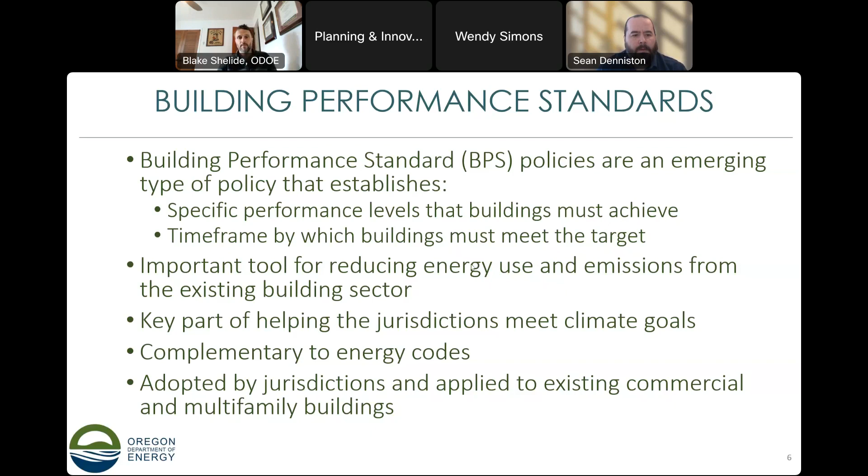In general, building performance standards include a number of components. Those components range from scope, different performance metrics, targets, various compliance and phasing requirements, and implementation mechanisms. I'll talk about a few of these in detail.

As far as scope goes, the scope of a BPS policy defines the buildings that are covered by the standard. The process of developing that scope is often informed by the objectives of a specific jurisdiction, whether it's energy or greenhouse gas, and also by specific considerations for target setting in order to achieve performance targets that can be established for each covered type of building.

The two primary factors that are considered generally by jurisdictions when establishing the scope of the BPS are the types of buildings to be covered, and then the size of the buildings, the threshold above which buildings will be required to comply with the standard.

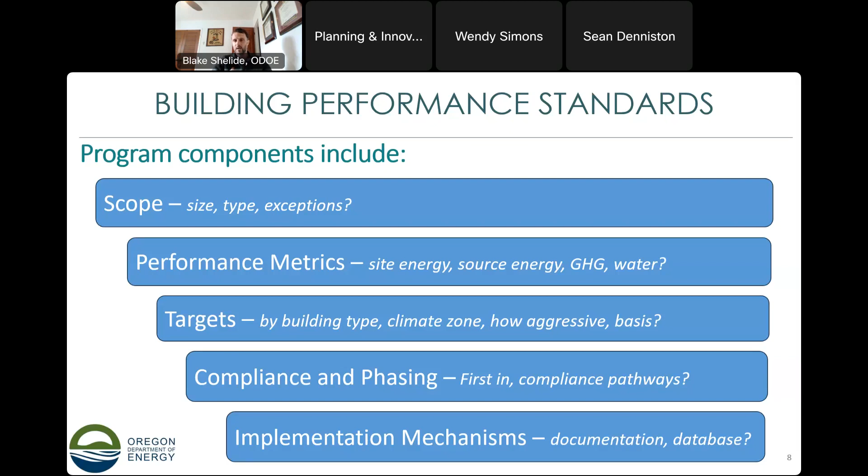And then other program activities like outreach, training, education, and things like that are critical components of a BPS.

So just to review some of those critical components: in general, building performance standards require certain building owners to meet certain performance targets by a specified date.

There's a number of critical key considerations that go along with BPS. There's aligning and establishing goals, how the BPS program and energy efficiency and greenhouse gas reduction from buildings fits within a jurisdiction's overall goals. Determining the covered properties, what property types, are there any exemptions and accommodations for things like financial hardships, or building occupancies like industrial or agricultural uses.

Considering various compliance approaches: is the compliance approach just meeting an EUI target? Maybe there's a prescriptive pathway as well. Maybe there's a conditional compliance pathway if a building can't get to the target but is taking steps to try to get there.

Another key consideration is providing support to building owners in terms of education and technical support. Some jurisdictions have incentive funding for early or voluntary compliance. There's also the potential to work with other partners or utilize other incentive sources to help get down to EUI levels to meet building performance standards.

And then establishing reporting requirements that are meaningful and achievable for building owners to report their energy use and document compliance.

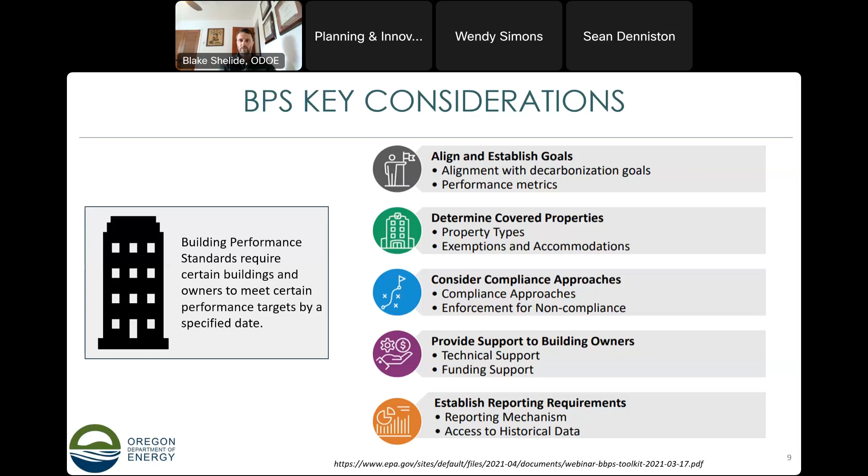There are a number of benefits to building performance standards in general. There's certainly reduction in energy use and reduction of greenhouse gas emissions to support jurisdictions in meeting their climate goals. Supporting local workforce, as building owners identify energy measures needed to get down to efficient levels of performance, that supports local workforce and jobs to improve that performance through investment in energy efficiency measures and technology.

One of the side benefits, the non-energy benefits of energy reductions and meeting performance levels, involves improved comfort, improved heating, cooling, ventilation, and lighting systems in buildings to use less energy and improve indoor air quality and comfort. And then, of course, when you reduce energy, you reduce utility cost and on-bill cost for building owners, through implementation of cost-effective energy measures to reduce the operating cost and energy burden of building owners and tenants.

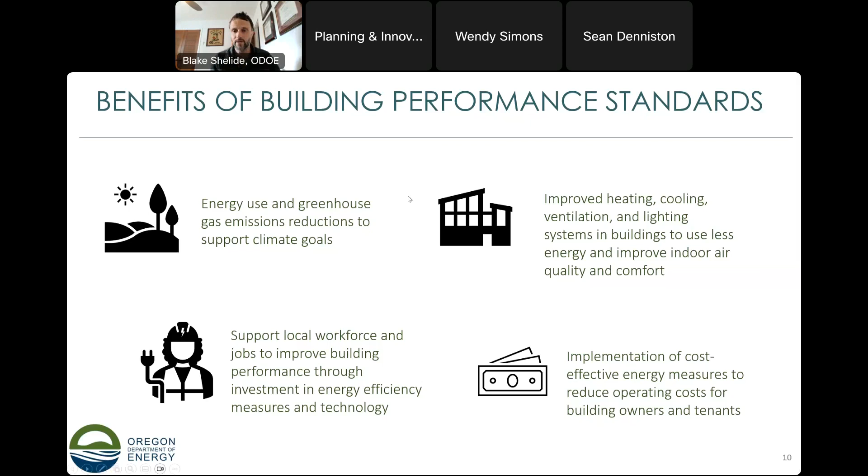Oftentimes, BPS, building performance standards programs, will build upon an energy benchmarking program, where you might see a jurisdiction or a state first start to track energy usage, and then based on that data and the analysis that happens afterward, a BPS program might be established. I mention this because the Oregon program defines Tier 1 and Tier 2 buildings, and Tier 2 buildings are directed to benchmark first, with an ultimate evaluation in a few years to look at the potential for a full BPS and energy targets for those Tier 2 buildings. But the first step is benchmarking. This is the approach a lot of jurisdictions have taken: first phase benchmark, second phase building performance standard.

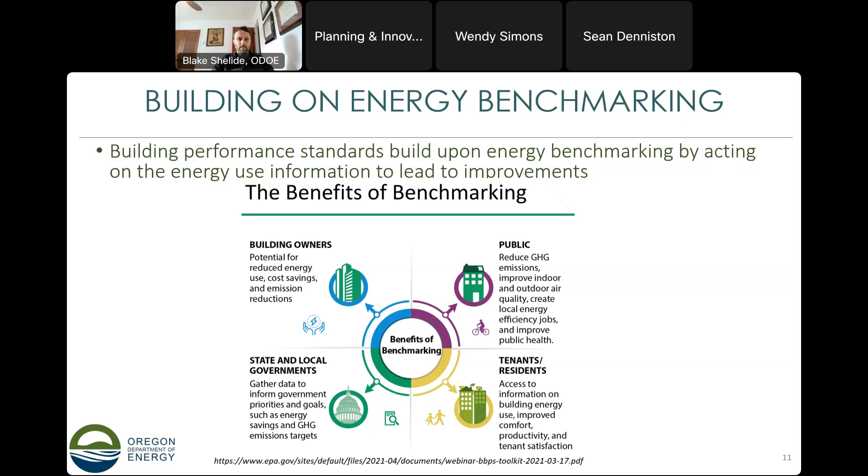BPS programs are generally an iterative process. For jurisdictions, first the performance standard, the policy, is established. Then within the compliance cycle, the first set of targets, like energy use intensity targets, are set for existing buildings by climate zone and by type of building. Buildings make improvements if needed, evaluate options if they're not already hitting the target, meet the targets, and submit their compliance data. Using the Oregon legislation as an example, we're directed to reevaluate the targets every 5 years and potentially reset them, where you might set a target at the average building use for the first phase, and then 5 years later readjust and perhaps ratchet down or up that target based on the data.

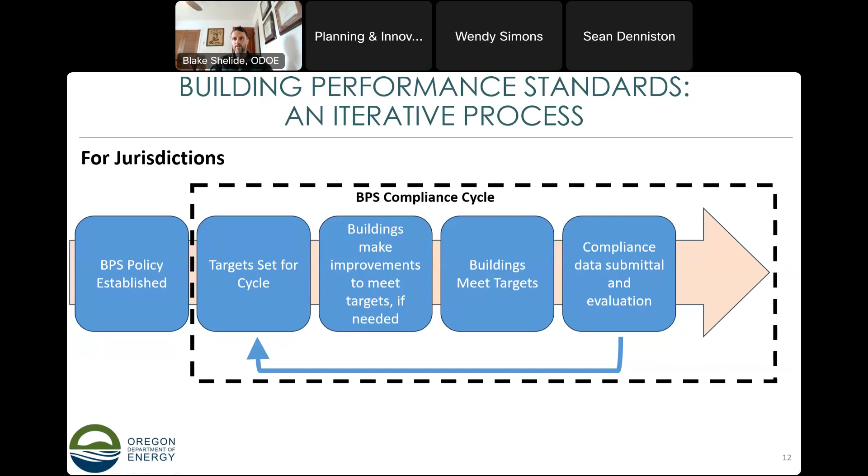So it's an iterative cycle for jurisdictions to implement building performance standards, and they're usually set up this way to cycle through performance over time, so that gradually, with each subsequent phase, buildings become more and more efficient. Similarly, it's an iterative process for building owners to comply with the building performance standard.

This uses a flowchart from ASHRAE Standard 100, which is a building performance standard published by ASHRAE, and the Oregon process will be based on this one, but it's just used here as an example. First there's the process of implementing operations and maintenance programs, calculating your energy use intensity or greenhouse gas intensity to figure out where you are and how you compare to the target set for your jurisdiction. If you meet it, the building complies and you complete the compliance forms and documentation.

But if not, you engage in this iterative process where a building owner might do an energy audit, prioritize, and identify measures to help get to the target based on cost effectiveness and which ones can be done first, generally identifying what measures are needed to meet the target. Then verify that the savings are occurring, and the decision point is: are you now meeting the target? If yes, move on to compliance documentation. If no, reiterate the process again, maybe do a deeper energy audit, look at other options or measures that weren't evaluated the first time, and continue cycling until the target's met. That's the general process cycle for building owners to meet a building performance standard.

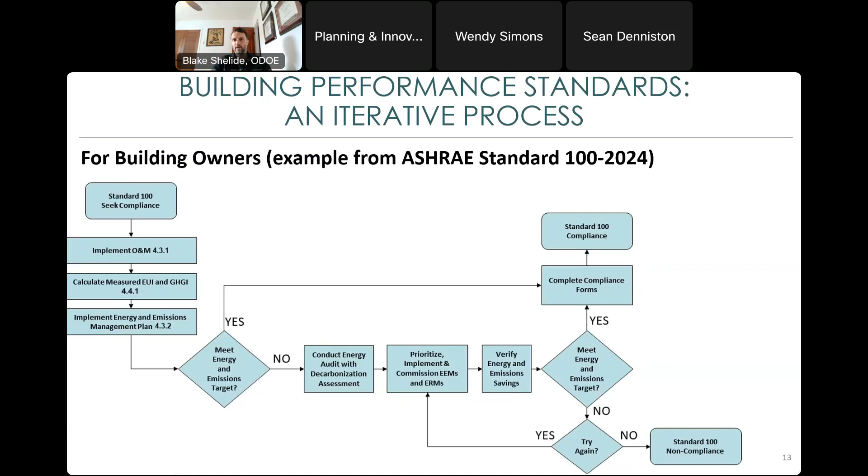So that covers building performance standards in general, nothing specific to the Oregon process yet. Although if you're familiar with what will be implemented in Oregon, you'll recognize a lot of components that come from the general building performance standard concept and policy included in the Oregon legislation. So the next thing I'll talk about is reviewing the specific House Bill 3409, which established building performance standards in Oregon.

House Bill 3409 came out of the 2023 legislative session, meant to address energy use and emissions in existing commercial buildings. It will require many large commercial buildings to enhance energy management practices and implement energy efficiency measures to meet energy use targets. It's modeled after ASHRAE Standard 100. The program is administered by ODOE, and it's modeled very closely after the Washington State program. Washington State is about 2 years ahead of Oregon in program design, implementation, and compliance. I believe the largest buildings in Washington will need to be phased in for compliance starting in 2026.

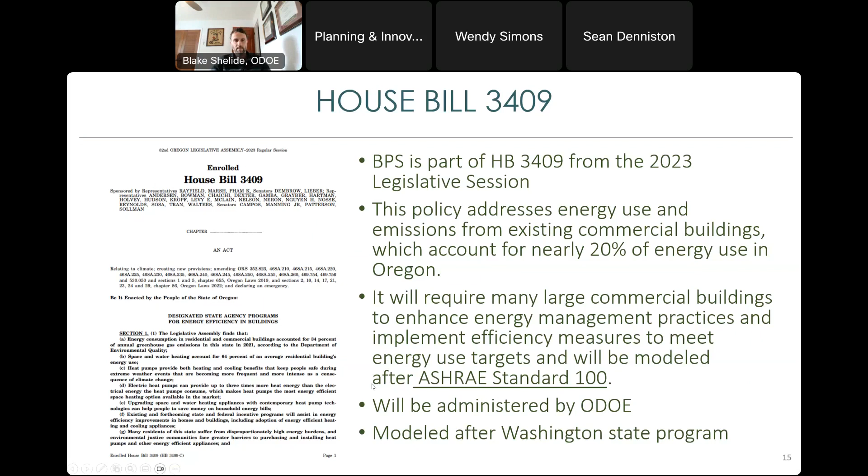So now we'll take a quick moment to go over some highlights from the different sections of House Bill 3409. House Bill 3409 is a very large bill. It includes a lot of different energy and climate related policies, and building performance standards is really just one small section of that bill. It's sections 8 through, I believe, 17. I think I saw a chat question come in about these slides - yes, these will be available on our website along with a full recording of the presentation. So I'll take this opportunity to go through some highlights for each section and walk you through what's in 3409.

In section 8 of House Bill 3409, it starts with providing definitions for our BPS. It defines what's a tier 1 building, what's a tier 2 building - I'll go into more detail later on those. But I did want to point out how it defines energy use intensity. It's defined as specific to site energy use. We sometimes also refer to source energy use, which is the energy use it takes to generate, for example, electricity at the power plant and bring that to a building site. But site energy use is just the building - if you draw a box around the building and the utility meters, it's the energy that enters at the site level, generally what you see on the utility bill. That's what Oregon's building performance standard will be designed around, normalized and converted to units of thousands of British thermal units, BTUs, per square foot per year.

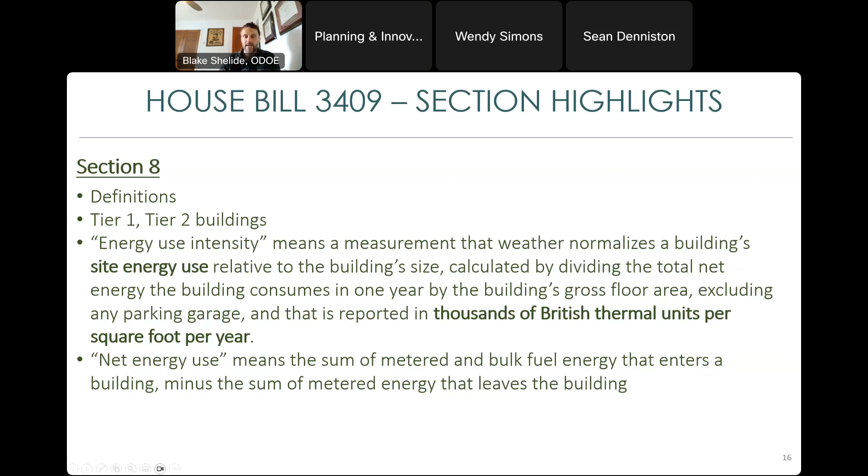Section 9 of House Bill 3409 directs ODOE, giving some direction for administrative rules to establish building performance standard criteria. It directs us to adopt rules for the BPS using ASHRAE Standard 100 as a model that first seeks to maximize greenhouse gas emissions reduction from covered buildings, includes EUI targets for specific types of buildings, and offers a conditional compliance pathway - if a building owner can't quite get down to the target yet, but is making steps to do that. It directs us to develop specific energy use intensity targets that are not more stringent than the average energy use intensity. This is the guideline we're using as we go about our energy use target analysis, looking at a variety of data sets to determine the average energy use intensity across different building types. Our targets will be at or not as stringent as those averages, because that's how it's defined in the legislation.

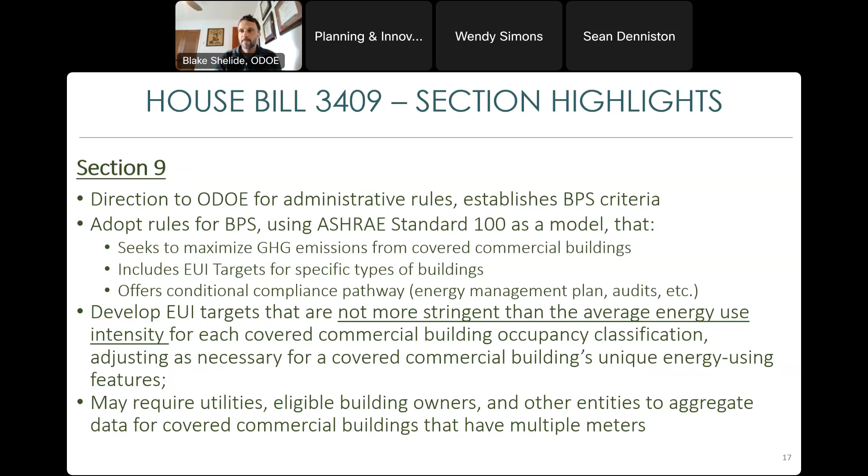Section 9 also specifies that our rules may require utilities, eligible building owners, and other entities to aggregate data for covered commercial buildings that have multiple meters. So there will be buildings where it's one building but has multiple meters serving it, where you need to aggregate the sum of all the energy use in order to generate a building-wide EUI. That'll be part of our rules as well.

When I talk about different building types, there are high-level building types you can imagine, like education, entertainment, healthcare, offices, but then there's more granular levels. Just within healthcare, you can have different property types - for example, a hospital, a medical office, an outpatient rehab, physical therapy type - that all have sometimes significantly different energy profiles and different uses, where it's likely necessary to develop a separate classification and perhaps a separate target for those property subtypes.

Section 9 also directs ODOE to create a database of eligible building owners and covered buildings based on county assessor records and other sources. We're engaging with the county assessors to evaluate what data is out there to generate that covered buildings list, filter for buildings over the size thresholds that meet the occupancy types for Tier 1 and Tier 2, and notify those building owners by July of next year. That's a process we're engaging in.

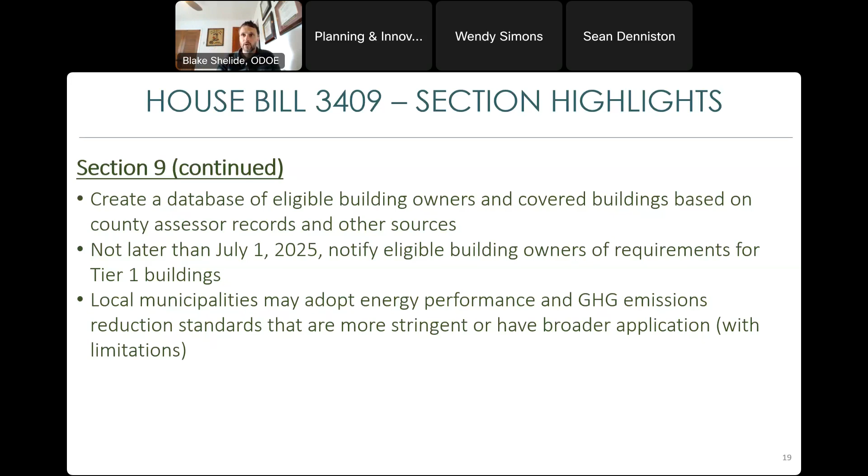The next section of House Bill 3409 covers Tier 1 building owner reporting requirements, specifying that new reports are required every five years. It provides a number of exemption criteria for types of buildings exempt from a BPS, which I'll mention in a future slide. It requires ODOE to develop a support program providing information, periodic training, and technical assistance, phone and email support to building owners to help them comply. It provides compliance timelines phased with the largest buildings first, and it defines civil penalties for non-compliance.

I saw a question come in the chat about what happens if a building owner doesn't comply. There is the potential for a penalty or fine, up to $5,000 plus $1 per square foot per year for non-compliance.

Section 11 of the bill directs ODOE to adopt rules that ensure timely, accurate, and complete reporting for Tier 1 buildings, enable our agency to effectively enforce the standard and the targets, and provide a means for affected eligible building owners to appeal decisions and enforcement actions. Say there's a fine that's applied, we'll be defining a process for appeal.

It also ensures that eligible building owners are responsible for paying the cost of compliance, not necessarily just passing those costs on to a tenant, for example. And it directs us to consult with an advisory committee before adopting rules, a process that's already kicked off. We formed the rulemaking advisory committee, and I've got a RAC schedule on a future slide.

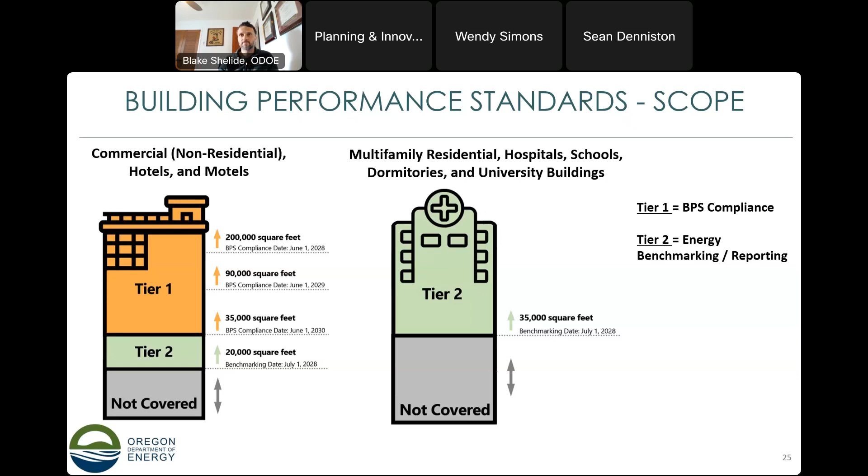To give people a general feel, a frame of reference for what size of buildings we're talking about when we say 35,000 square feet or 100,000 square feet: your average Safeway store is about 35,000 to 45,000 square feet, so that's about that size in terms of building footprint. If you've been to our agency's office in Salem, it's a 3-story building, and counting the basement it's about 100,000 square feet, so the footprint itself is in that 30 to 40,000 square foot range as well. Your average Home Depot is about 100,000 square feet too, just to provide a frame of reference for the magnitude of buildings that could potentially be covered.

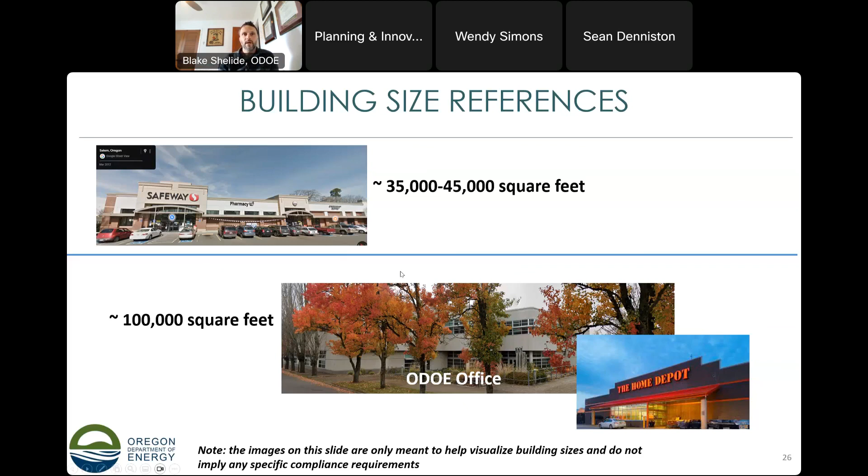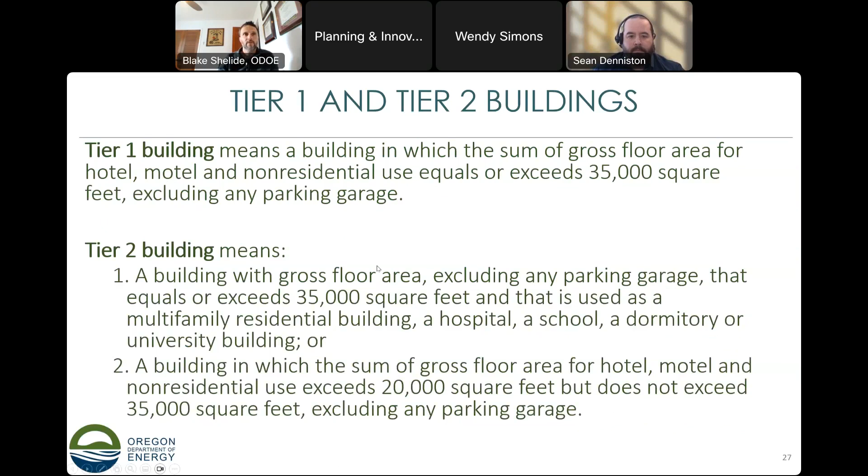The graphic a couple slides ago gave an illustration of what's a tier 1 building versus a tier 2 building. This language is the definition directly from the statute, providing a bit of background. I won't read it verbatim, but it's there, this is the language in the statute itself, in the bill.

These are the requirements from House Bill 3409 regarding when we need to set rules for these buildings. So this year we'll be engaging our rulemaking to set a building performance standard for tier 1 buildings and set a building reporting requirement for tier 2 buildings.

And when you're considering compliance, what does compliance mean for a Tier 1 building? The most straightforward pathway for compliance is meeting the energy use intensity target. If you meet the target, the building complies. You have to report and document your compliance, but that's really the simplest pathway.

There will also be conditional compliance pathways, like investment criteria type pathways that ODOE establishes, such as a building owner who's done audits and made energy investments but hasn't quite gotten down to meeting the performance levels yet. There'll be a conditional compliance pathway for those sorts of buildings.

And then there will also be eligible exemptions allowed under House Bill 3409, where maybe a building doesn't have a certificate of occupancy, or it has particularly low occupancy, as defined in the statute. If the total gross floor area, after subtracting unconditioned and semi-heated spaces, is under the 35,000 square foot threshold, those spaces don't count toward total square footage, and that provides an eligible exemption. If the primary use is manufacturing or industrial, as defined through Factory Group F or High Hazard Group H in the building code, agricultural buildings, and buildings experiencing certain financial hardship criteria defined in the statute would also be exempt.

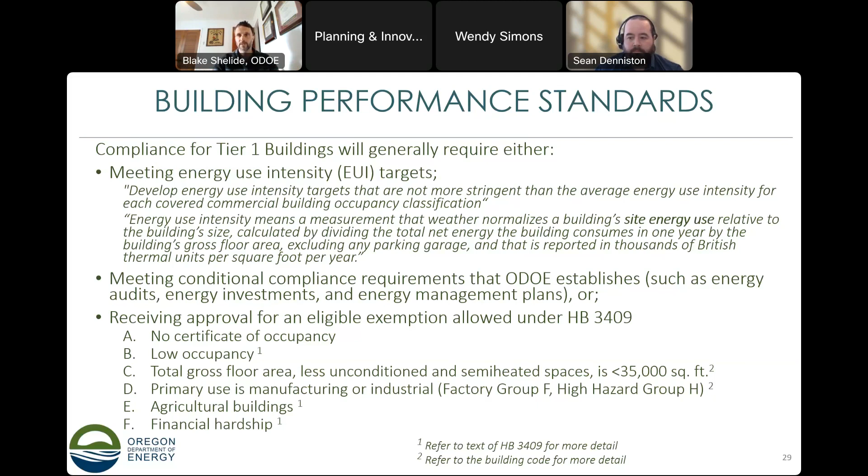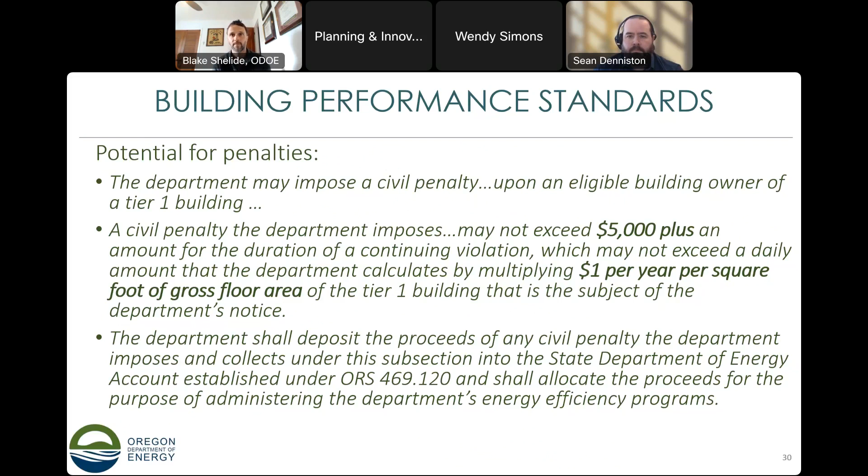I think there was a question before, and I mentioned it too—what's a potential ramification of not complying? There is the potential for civil penalties for noncompliance for building owners, which may not exceed up to $5,000 plus $1 per square foot of gross floor area per year. So there is the potential for noncompliance penalties for building owners and for buildings.

You might be wondering, there are all these building performance standards around the country—some use ASHRAE 100, some don't. Why is Oregon using ASHRAE 100? It's directly in the bill, directly in our statute, directing us to use it as an initial model for an energy performance standard for covered commercial buildings. But there's a few other reasons it made its way into the bill.

One reason is that our building performance standard was modeled pretty closely after Washington State's, which included ASHRAE 100 as its basis. Oregon also uses another ASHRAE standard, 90.1, for its energy code, referencing it directly. So there's some complementary nature to having our BPS also based on an ASHRAE standard. For state-owned buildings, we've been referencing ASHRAE standard 100 and its targets for some time too, so there's experience with the standard already.

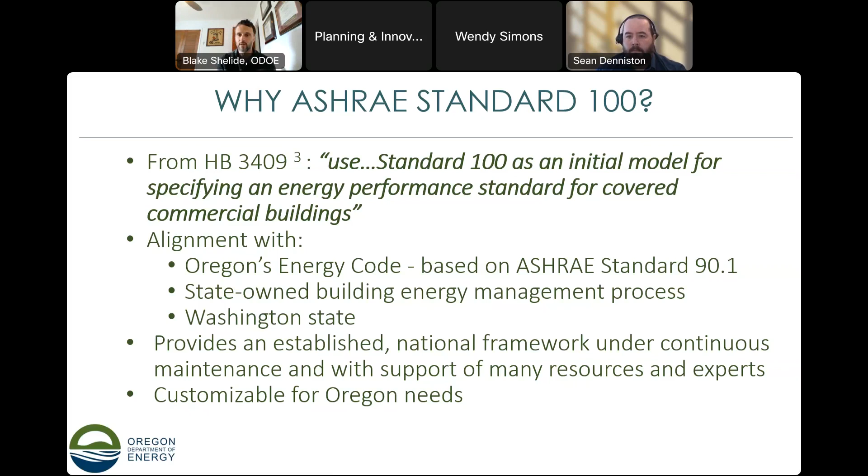Also, all ASHRAE standards are generally under continuous maintenance, providing an established national framework, with the benefit of support from subject matter experts and resources that go into the committees developing these standards. They're very robust, with a lot of expertise embedded into each successive iteration. A new version of the standard was just published a couple months ago—the 2024 version—that Oregon will use as its basis, so the timing works out well, and it's customizable for Oregon's needs. We're working out a licensing agreement with ASHRAE to take that standard, modify it for Oregon, and offer it to Oregon users once that integrated version is established.

So I've talked about the timeline in general, but here's the timeline on a chart too. This year we're doing rulemaking, and I have to finish it by next year. We have to notify Tier 1 and Tier 2 building owners by the middle of next year. Compliance phase-in starts for Tier 1 buildings in 2028, then moves along each successive year down to a lower building size threshold.

Tier 2 benchmarking is also required in 2028, and we have to evaluate that benchmarking data by 2029. Around the same time, we'll be updating our Tier 1 targets in 2029, considering we'll establish the first cycle of targets in '24—so 2029 is five years later, and we'll be reevaluating some of those targets.

And then in 2030 is when we'll have to report on a potential building performance standard for those Tier 2 buildings. And just a few other supplementary activities that we're doing this year.

We're hiring staff to help implement our standard, going through a process of identifying the covered buildings, standing up incentives. We will be issuing a couple different requests for proposals to support our work, to help us set energy use targets, help identify covered buildings throughout the state, and then help us engage in community-led stakeholder engagement as we go through the process.

I mentioned the stakeholder licensing, the ASHRAE standard licensing agreement that we have in place to be able to use that standard and modify it.

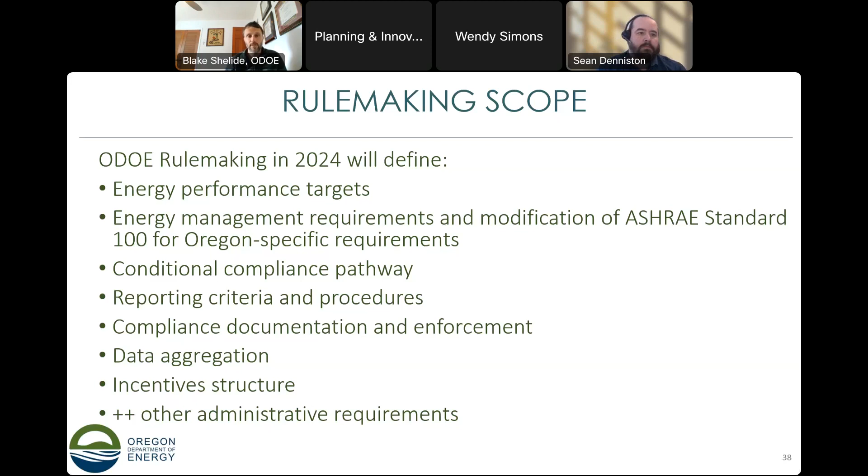So what are we going to cover? We talked about the rulemaking schedule. What's going to be covered under the rulemaking this year? We'll be setting the energy performance targets for different types of buildings, going through energy management requirements, potential modifications to ASHRAE Standard 100 for Oregon-specific requirements, conditional compliance pathways, various reporting criteria, procedures for documenting compliance, data aggregation for buildings with multiple meters, the incentive structure, and other administrative requirements.

Our rules will be structured very closely to the outline and format of ASHRAE Standard 100. If you open up that standard, there are different chapters for definitions, compliance, energy management plan, operations and maintenance, targets, and each of those chapters in the standard will have our plan basically create an administrative rule chapter similar to that outline. Washington State's example, also based on Standard 100, had a similar framework where their sections of administrative rule are each based on the chapters and sections of ASHRAE Standard 100. So our plan is to do something similar.

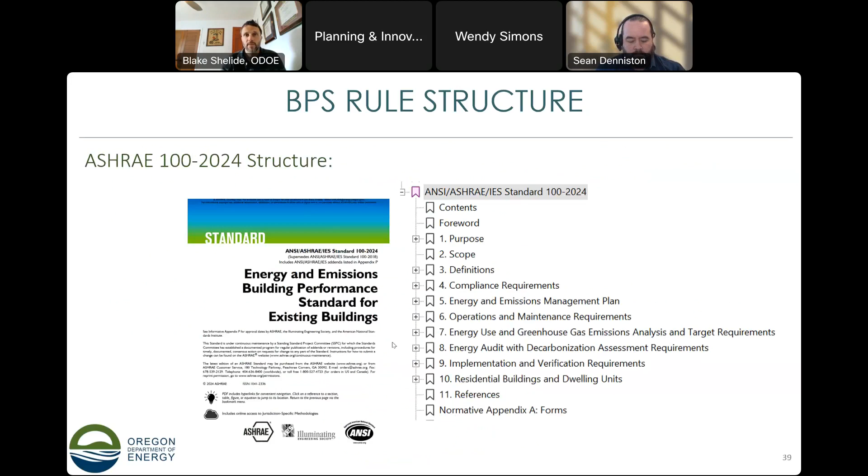What's in the standard itself, the language of the standard, after we've modified it for Oregon, will essentially become the Oregon rules. So our plan is for the rules to follow that same general structure as ASHRAE Standard 100, 2024 version, similar to Washington State's. Here's a link to Washington's if you wanted to look it over to get a preview of what Oregon's might look like. We recognize that some chapters will be straightforward and non-controversial, while others will be more involved and require more discussion. So as we go through it, we'll try to identify those areas and plan more time and more input opportunities.

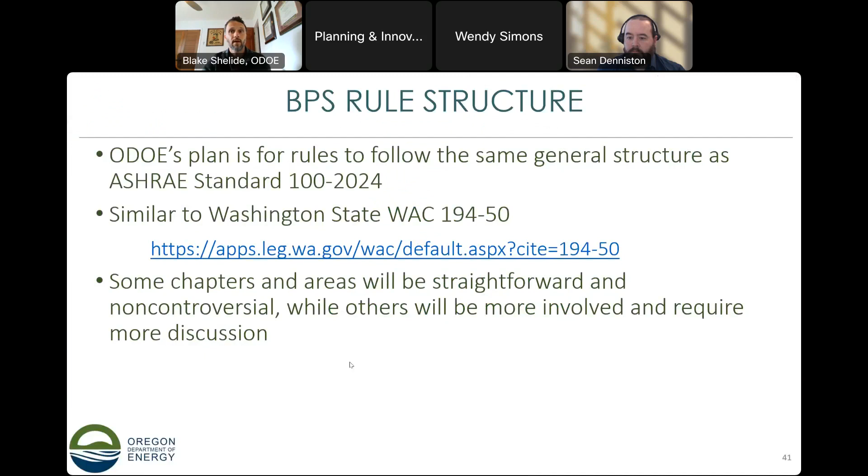And with that concludes my section and Wendy's section of the presentation. Before I hand it over to Sean Denniston with the New Buildings Institute to walk through ASHRAE Standard 100, I'll mention again that we've got the comment portal open.

These are the questions we've asked with this first round, just to give you a preview. We've shaped the questions to mirror the agenda today, but do you have any general comments on building performance standards and their planned application in Oregon?

Do you have any comments on ODOE's planned process for stakeholder engagement for rulemaking through the Rulemaking Advisory Committee and general public stakeholder meetings? The Rulemaking Advisory Committee was made up of certain sector representations and perspectives as defined in the bill. There were six different categories that needed to be included in the RAC, but we've got a broader RAC than that - about 14 or 15 members - expanded a little to include a number of different perspectives.

Those rulemaking advisory committee meetings will be open to the public to call in and view if you'd like. We will be taking the output of those RAC meetings, consolidating it, and bringing that output from the focused RAC meetings to the general public in a future broader public stakeholder meeting. So certainly welcome to attend the RAC meetings and listen in, but know there'll be another opportunity after that for more input through the general public meetings. Do you have any comments on our planned process for stakeholder engagement?

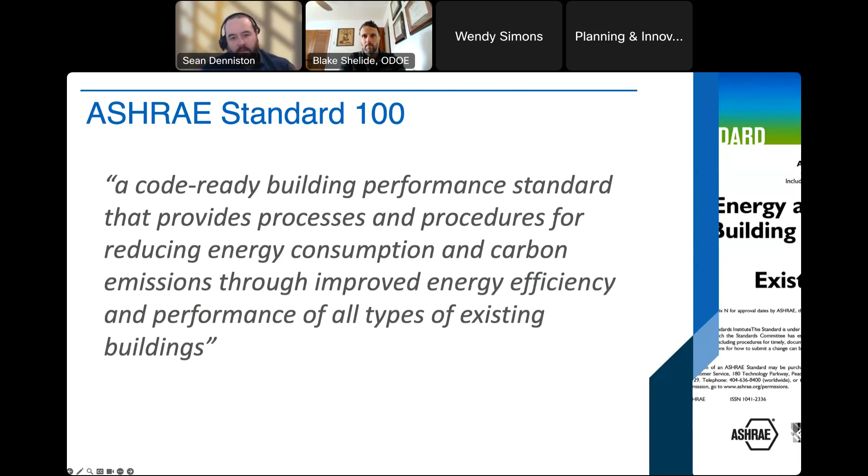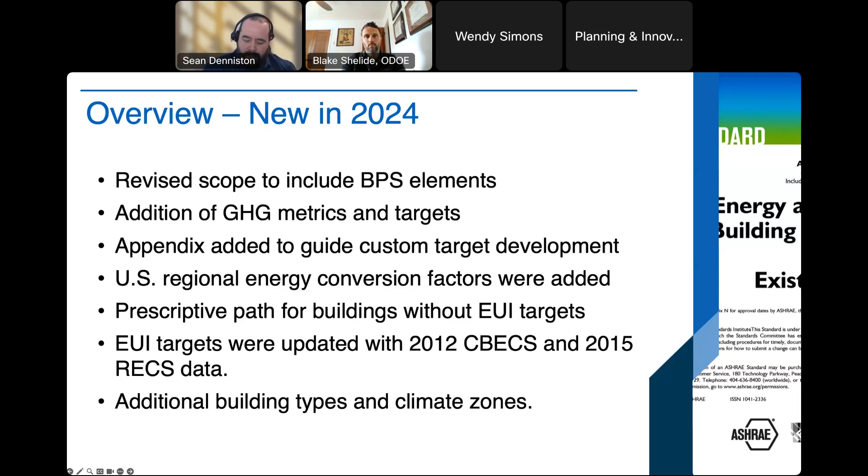Some of them are normative, you'll see that on the first three, and some of them are informative. Normative appendices are appendices that are considered part of the standard. So when you adopt the standard or when you use the standard, these are really considered integral parts of the standard. And then the informative ones are providing additional information to anyone who's using the standard. However, since Oregon is adopting this, Oregon has the flexibility to choose which of these appendices get adopted and how they get adopted.

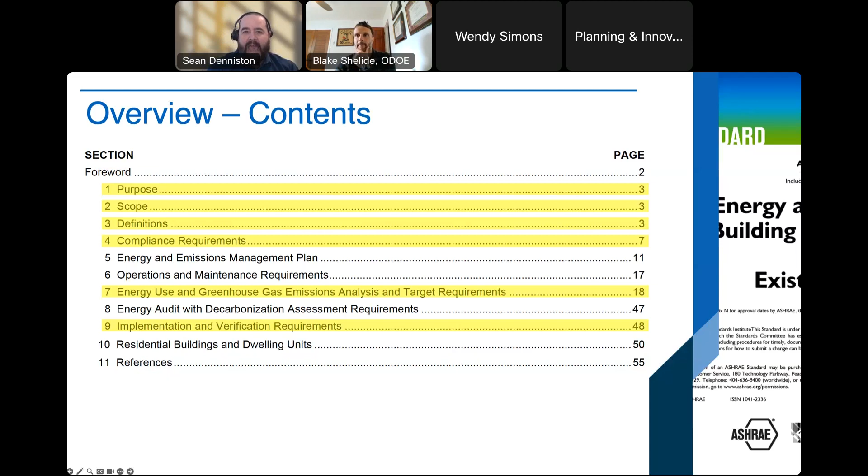Now, going back to the main body, you'll see that some of these sections are really core to the nature of a BPS, like we were talking about before. And so we've highlighted them here: the purpose, the scope, the definitions, the compliance requirements, energy use target requirements, implementation and verification requirements. Well, some of the other sections, while very useful to existing buildings and could be a good part of a really robust BPS implementation, are maybe a little bit less core to using ASHRAE as a building performance standard. And we see the same thing in the appendices. Some of them are really core to using the standard as a BPS, and some of them are useful to using the standard as a BPS. And so we're going to talk a little bit about the ramifications of that as we go through.

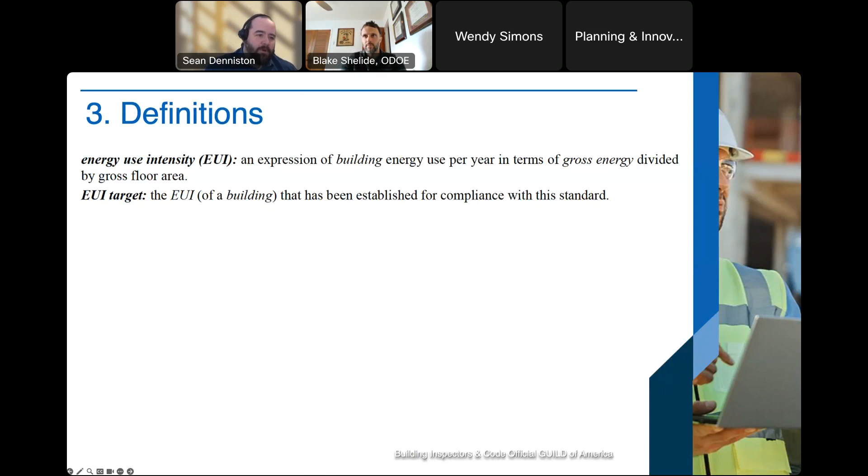So I want to just note one thing early on, which is definitions. Standard 100 has definitions, and some of these definitions are really important and need to be reconciled with Oregon's legislation to make sure that the terms are defined the same way. But we have some of the ones that a lot of people are probably used to, have seen before: energy use intensity, EUI, or EUI target. However, it has other terms that are really about how a BPS operates, like a qualified person. This often becomes a really critical piece in how you implement a BPS. Who is qualified to do certain tasks? And so we also have definitions like these, and might have to modify or even add additional definitions, as they play a critical role in making sure that the BPS operates smoothly.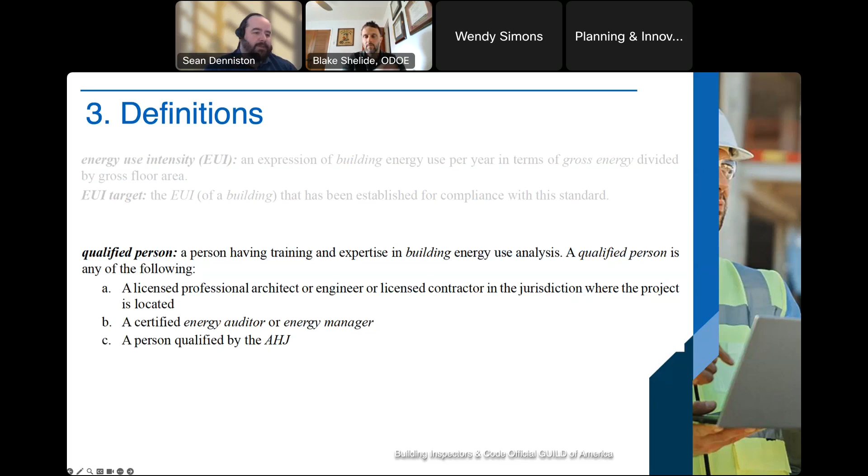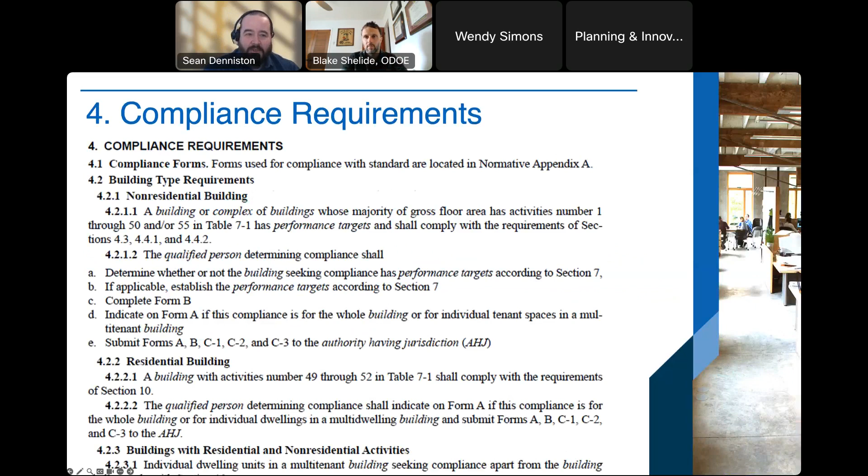And we'll just kind of keep going through section by section so that you can see what's in there. We will not be reading text, but I want you to see what the text looks like. So as we get into section 4, it's compliance requirements. So what's in this section? It's really wayfinding. It tells you which buildings comply with which requirements.

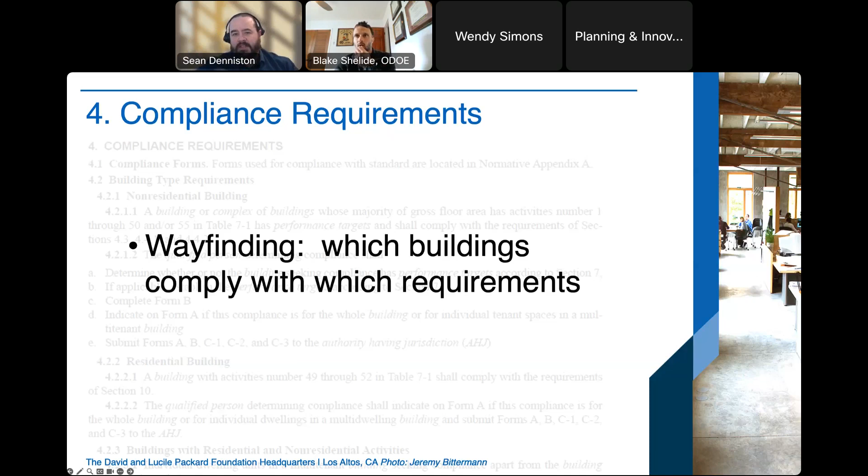Now, Blake gave you a really good breakdown of tier 1 and tier 2 and the timelines. That's the sort of information that would generally be found here in this 4th section. It tells the buildings, it'll lay out, what is the building threshold for size, what are the building types, and which of the requirements throughout the rest of the standard buildings will actually have to comply with. So you can almost see it as the wayfinding, the traffic cop that sends you through the various sections.

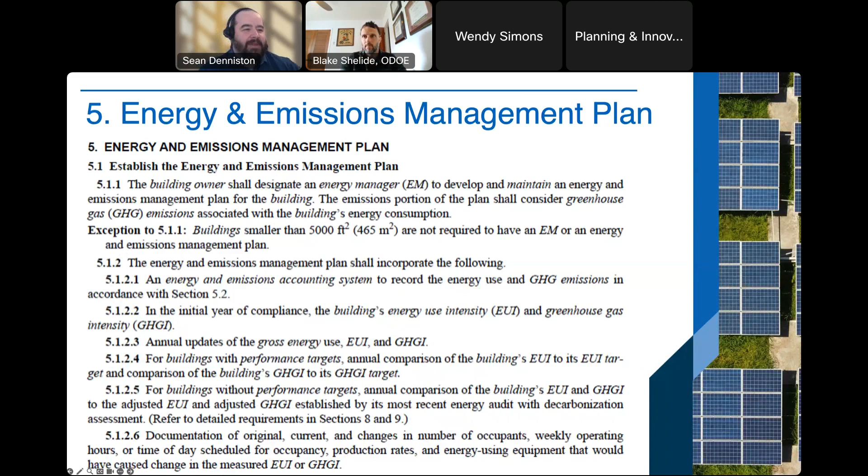Section 5 is an emissions and energy management plan. Again, you can see the nice dense text that ASHRAE likes to make, but really what this comes down to is requirements for a plan for how you're going to measure, monitor, and document your energy and emissions over time. So this is your plan - you might think of it as your plan for doing your submittals for the BPS requirements, how you're going to get all that information together.

We had a question earlier about how do we handle tenants in multifamily buildings. Well, that would be part of your plan - how you get that information you need, and then what you'll have to go through for your compliance and submission. So it really is the plan. It's forward thinking. This is the sort of thing you'd put together before you did your actual documentation and submission.

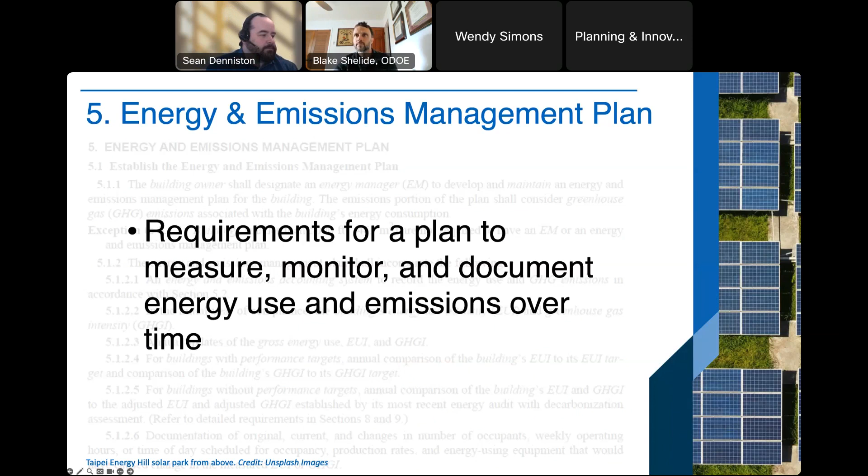Moving on to section 6, we have operations and maintenance requirements. These are requirements for not how you get the information, but how you're going to use the building, how you are going to structure your operations and maintenance activities to optimize your energy performance, with the intent implied here of meeting the requirements of the BPS.

So this is where you would put your plans for, well, we know we're going to need to upgrade something because our performance isn't there. Or we know we're going to need to do some retro commissioning because our equipment should be operating better than it is, and we need to really get that performance in line - looking at this long term and at the BPS target dates to make sure it happens in time to meet those targets for the deadlines.

So it really is forward thinking. This is how we're going to run our building to meet our targets, and this is what we're going to do to our building if we need to make modifications to bring that performance to a level that meets the BPS targets.

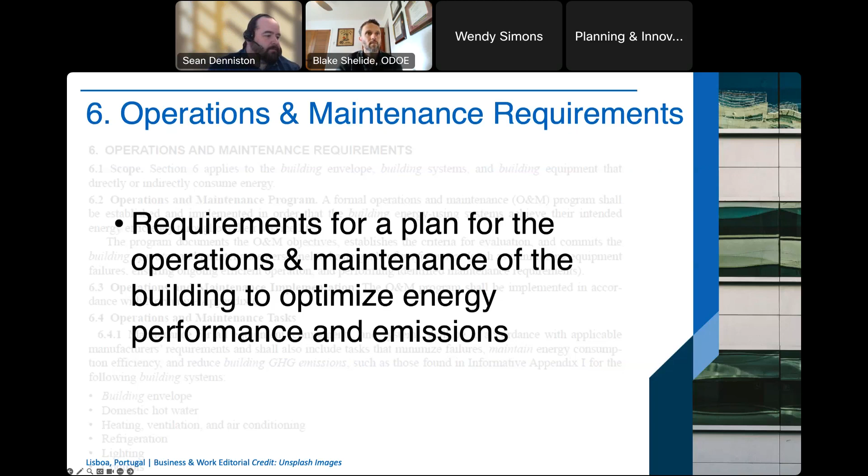The next section is energy use and GHG target requirements. This is kind of the meat of things really for a BPS. Really what it comes down to is this is where the targets live. But it's more than just a table of numbers you'd look at, because there are lots of special situations when you're doing this. The target's going to be different by building type.

Sometimes you're going to have buildings with more than one use type inside them, and so how do you do that blended target that reflects multiple uses within a single building? Whether there will be any adjustments allowed for vacancy, schedule, or occupancy density - any kind of normalization that might be part of the BPS would be included in this section. So this really gets to the nuts and bolts of what targets you need to meet and how you do those calculations.

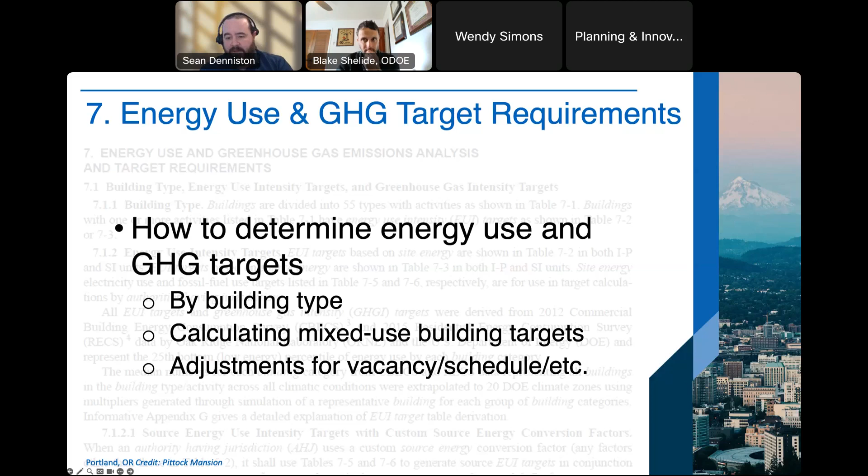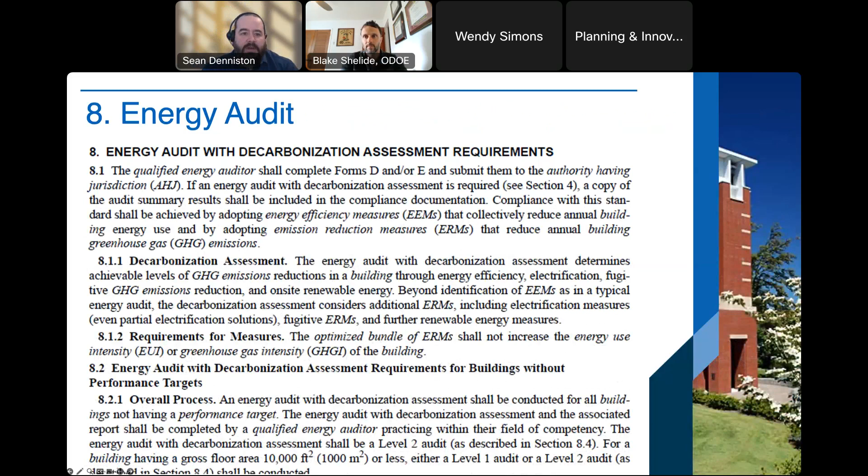This gets back to that operations plan. Well, you need more information than just 'we're using too much energy.' Why is the building using too much energy? And so this section lays out a procedure utilizing an energy audit, and what that energy audit needs to include to determine what it is and why a building is performing the way it is, and where those opportunities for improvement actually are.

So it lays out the requirements for the audit itself, and requirements for who can do the audit - again this comes back to the 'who can do certain tasks' information. And then in the 2024 version of this, it gets to not just energy use, but decarbonization, which is really big on a lot of people's minds, even though Oregon's BPS is based on energy use and EUI instead.

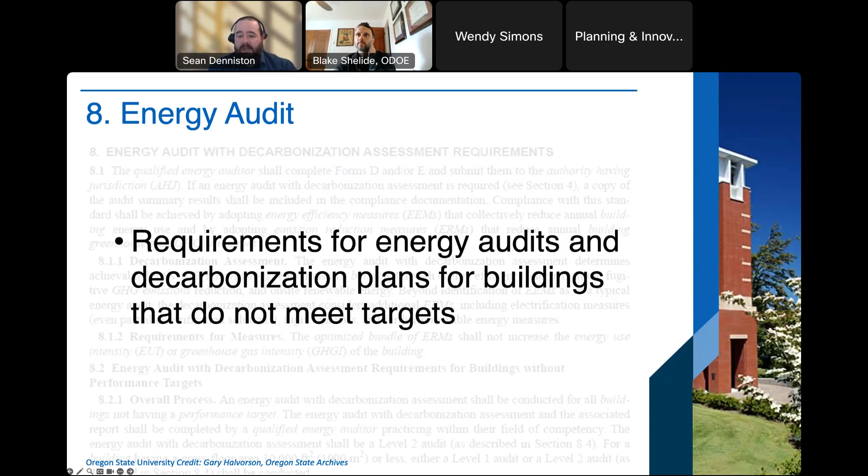And then the next section, we are looking at implementation and verification. This section includes requirements for energy efficiency measures to demonstrate compliance, and requirements for energy auditors verifying energy efficiency measures. Earlier you saw Blake talk about and show this idea of compliance alternatives.

So what this really lays out is a series of prescriptive requirements that might be the way you demonstrate compliance - where you do this, this, and this, you improve your envelope this way, your lighting this way, your HVAC this way, and that demonstrates compliance, even though historically you haven't actually met the requirements. This can really help with the timing of when a building needs to show compliance with the BPS, and this is one of those sections that could be really useful in implementation of a BPS.

When we look around the country, some jurisdictions have this as a way to comply with the BPS. Other jurisdictions don't.

So that's why this was laid out as one of those sections that's really useful, but isn't core necessity to the nature of a BPS.

Section 10 is residential buildings and dwelling units. It's important to note that this doesn't refer to multifamily buildings. This whole section is a consolidated set of requirements from previous sections, almost a repetition, meant for single family homes and looking at a single dwelling unit, like a single tenant unit within a larger multifamily building. So when thinking about multifamily buildings generally, that doesn't fall under this section, it's treated just like all the other buildings in the other sections. But if you're looking at just a single dwelling unit, then you would use this section. If a BPS applied to single family homes, you would look here.

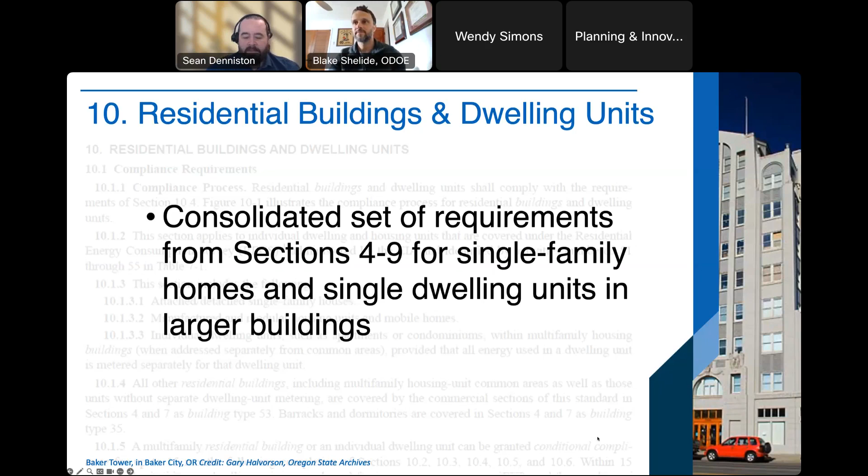So this takes us through the main sections of the standard. Now we're going to look at what's in some of the appendices and the role they might play in Oregon's implementation of a BPS. Again, we have sections more central to the implementation, and we'll focus more on those.

Of course, forms—I think Oregon is going to adopt its own way of doing compliance, but you can start to see the types of information that would need to be submitted through any BPS submission process. It's nice to see the types of information likely to be there. It also has this great table for a timeline, another way of thinking about that diagram Blake showed earlier about what steps you'd go through to walk through each section and get to the level of performance you need. This is Appendix D, which has this timeline.

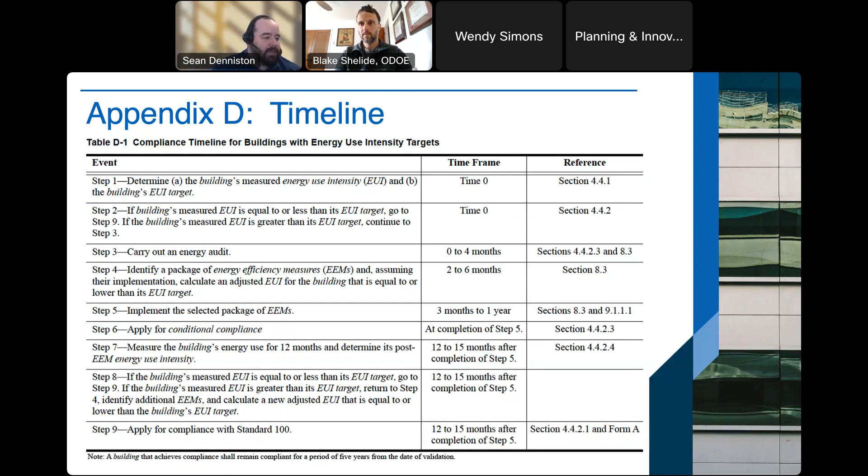Things like climate zones—in Oregon we have three climate zones, and those climates can actually be very different, which necessitates having different targets for each to reflect those differences. It may not be vastly different, but these are things we need to look at. These climate zones pretty much follow our county boundaries, and they're already laid out in Standard 100.

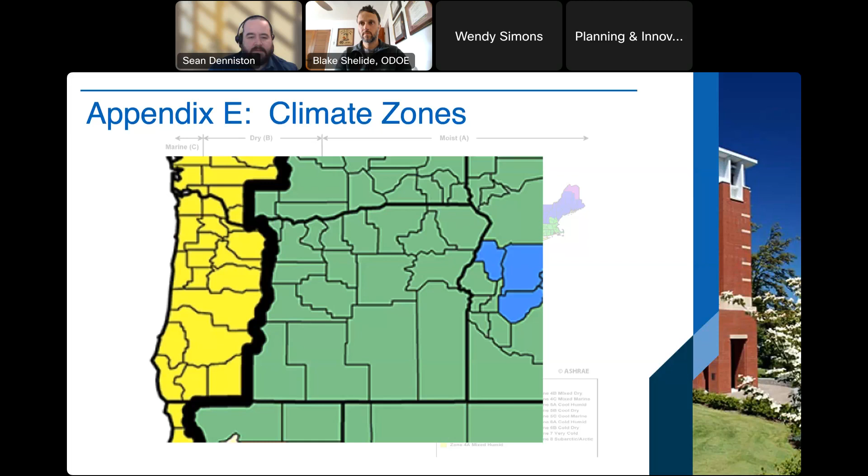Appendix J, guidance for locally derived building performance targets, will be very useful in Oregon's implementation, since we're looking at how to set targets appropriate for Oregon. The targets in Standard 100 are based on big national data sets of performance, so as a result they're not always extremely regionally specific. The data in some areas might be a little thin, or not really specific to the actual buildings in those jurisdictions.

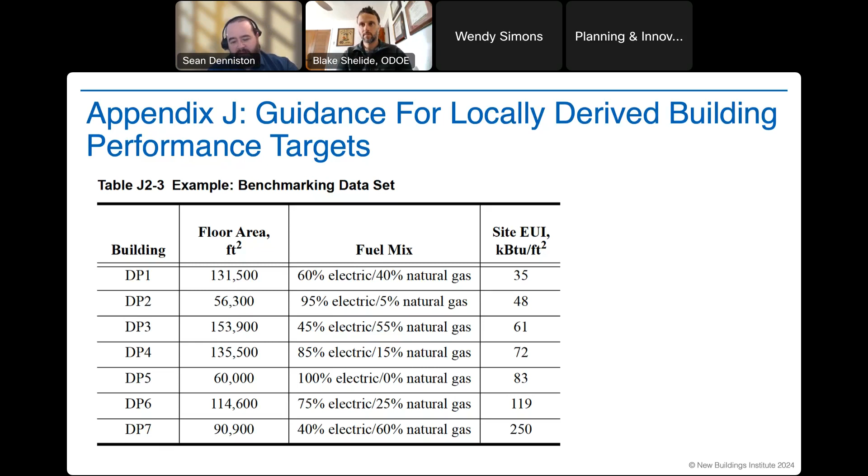So there's an opportunity to go through and see how you use the data available for your actual jurisdiction, the area you're covering, to create your own targets. It gives an example of a process: say you have a bunch of buildings, however you got your data, and you can look at some details about that data, and then how you turn it into targets.

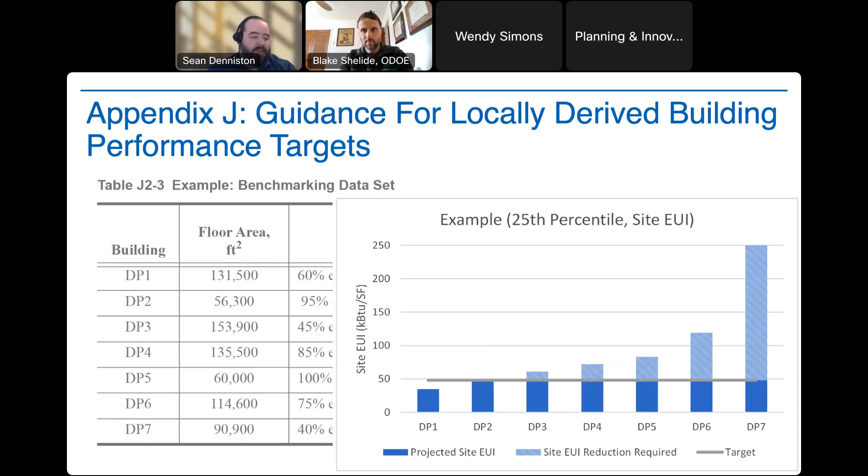Here's an example: we had 7 buildings, and if we set the target at the 25th percentile in site EUI for those buildings, some of them will need to do a reduction, some will already comply, and some will need to reduce a lot. It lays out this whole process for collecting and analyzing the data, and then assessing the results of setting targets at certain levels.

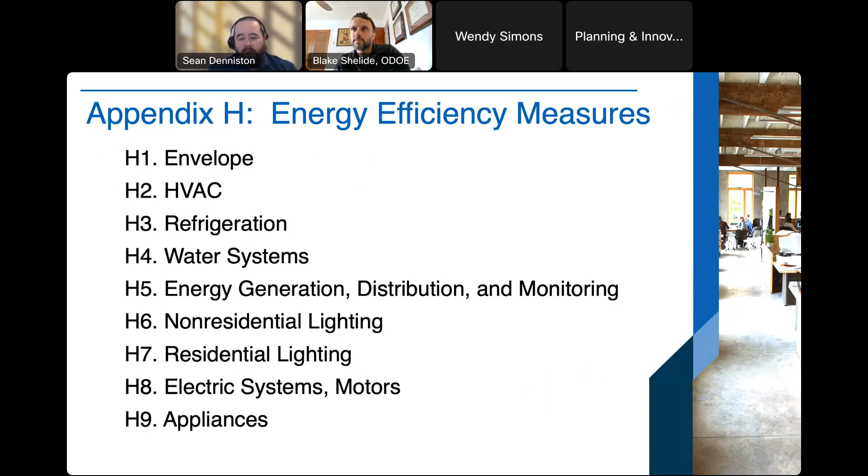Appendix H is where all those energy efficiency measures we talked about earlier actually reside. We really do have a full array of measures already built into Standard 100: envelope, HVAC, refrigeration systems, water systems, energy generation, non-residential lighting, residential lighting, electric systems and motors, and appliances. So a broad array of measures that can be leveraged as part of a BPS compliance process.

And then I think Appendix M is one that can be really, really useful. It's guidance on building type definitions, because when you really think about it, we call lots of things offices, but a lot of our offices behave very differently from one to the next. It's one thing to have an office that's a law firm, very different from an office that's actually a medical office. This provides a breakdown of how you can align some of these subtypes, how you might think of the spaces in your building, with the building types used in Standard 100.

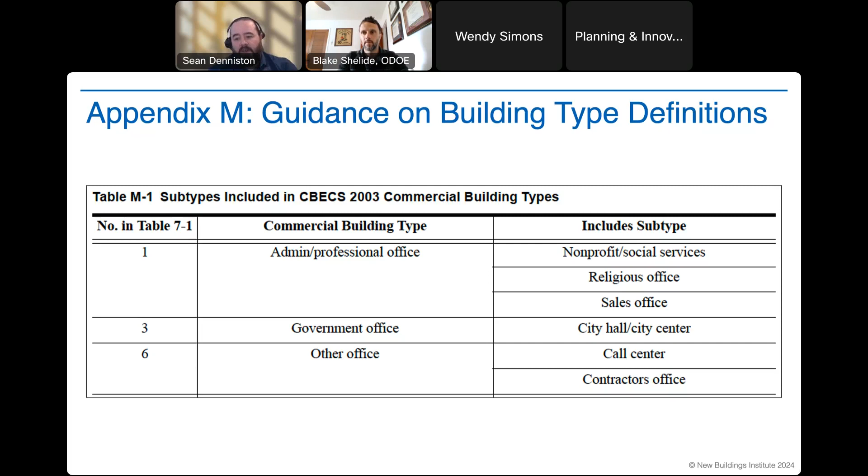Any of you who have used Portfolio Manager will find these very familiar, because they're basically based on the EPA building types and subtypes used in Portfolio Manager. They're also used in the CBECS building survey, so all those building delineations used for that big national data survey of energy use that went into ASHRAE Standard 100's original targets are aligned with this as well.

That's kind of our basic overview. You saw from the sheets, when I showed you the actual text, that there's really a lot there. For code wonky people like me, there's a lot to really dig your teeth into. But we wanted to give a general overview for this stakeholder group to see the sorts of things in Standard 100 that we'll be working from as we implement it as part of Oregon's BPS.

I'm going to pause for any questions on this section before we move into lessons learned from Washington's adaptation.

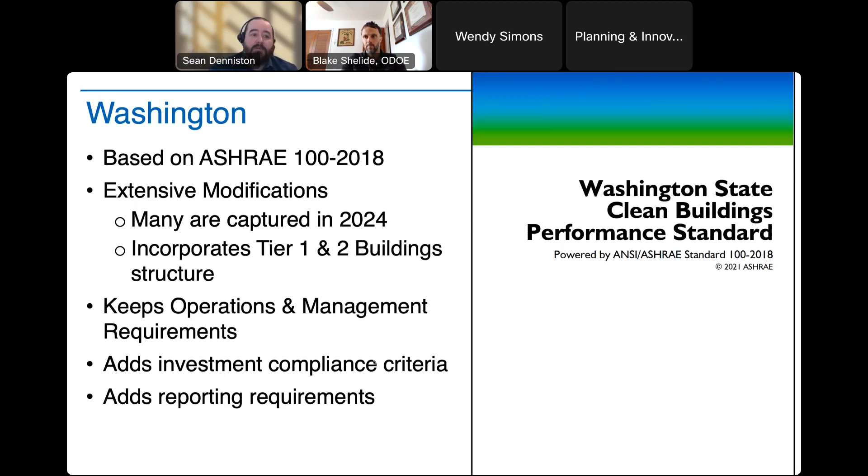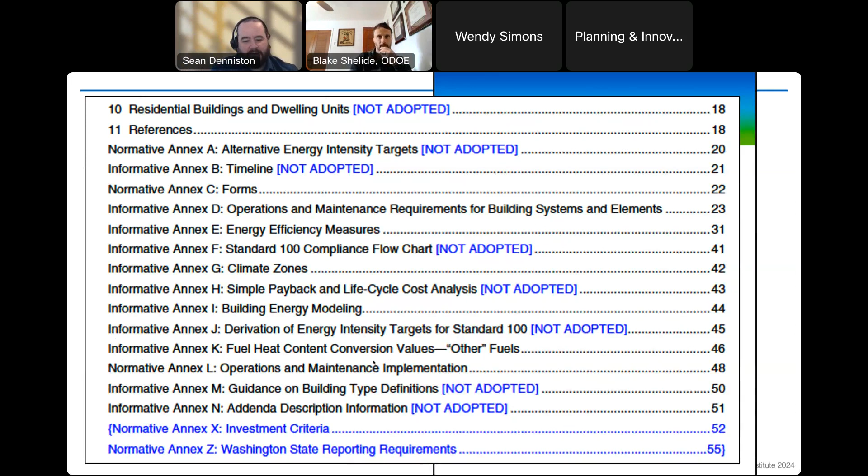This is a little fuzzy, but you can see how they handled some of these sections. They did not adopt section 10, which is about residential buildings and dwelling units, for the same reasons that Oregon is not likely to. They didn't adopt many of the appendices, and then they added these normative sections they called annexes at the time, but are just called appendices now.

What adaptation means - we looked at what some of that raw standard text looked like in previous slides. Here you can see blue text showing Washington had to make fairly extensive edits to the text of Standard 100, replacing pieces with new language to really make it work for them.

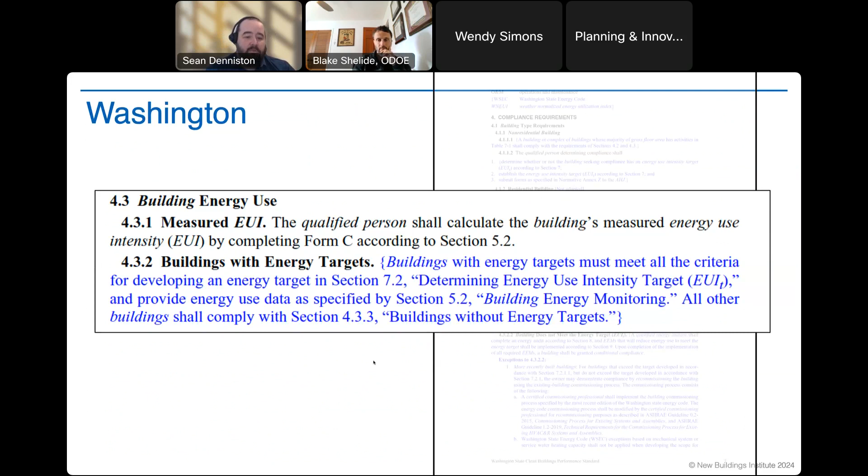So the lessons we've learned from Washington, at a high level, is that you can't just adopt Standard 100 - you have to adapt it to your specific needs. It takes getting into the text itself, and there are parts you might leave behind because they're not relevant to your use of Standard 100 as a BPS.

So that really gets into what this means for Oregon's process. We've heard details about what Oregon's process is going to look like on a schedule basis and a high level basis. When it comes to actually digging into adapting Standard 100, that's what we're going to talk about next.

One of the big questions is going to be starting with which sections are kept and which go. It's almost certainly section 10 is going, because that's just not part of the legislation we're working from. But we have these other sections that could be really useful to implementation of a BPS, maybe aren't as core. So which ones make sense to keep and which might make sense to leave behind - this is one of the things our process is really going to work to determine.

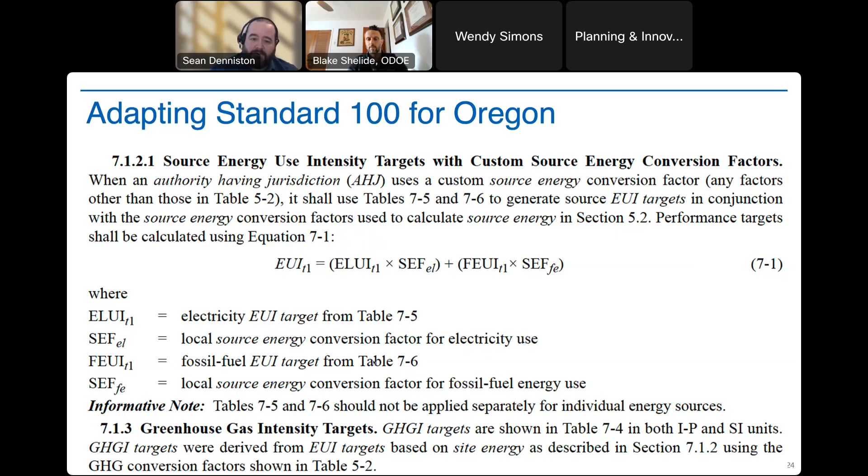Very likely, all of this text related to these would go, with one caveat that Blake did mention - there's the opportunity for local jurisdictions to go further than the state BPS. So some of this might be relevant to local jurisdictions as they look at how they can build upon what the state is doing, but we're looking primarily at how the state is going to approach this.

So there will be sections that need to be taken out, and sections that might need to be rewritten, aligning the language with the legislation and with lessons learned from the stakeholder process and the technical development of experts working on this and the community engaged. There might be sections that need to be rewritten to really apply to the way Oregon is using this. That adaptation process is really going to be core to how ASHRAE Standard 100 is implemented in Oregon, and I want to make that one of the big takeaways.

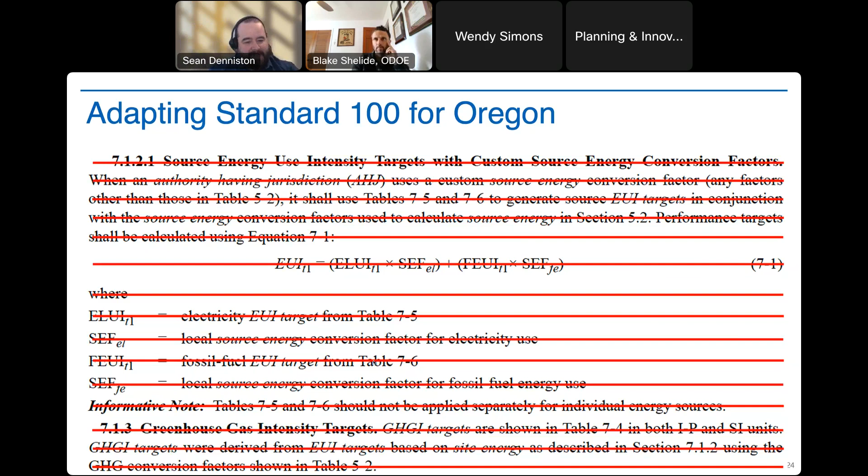We have this tremendous resource for use in Oregon. Standard 100 has a tremendous amount of content that is very useful for implementing a BPS, but we can't just adopt it as is - it really has to be adapted to align with both the realities and the needs of Oregon.